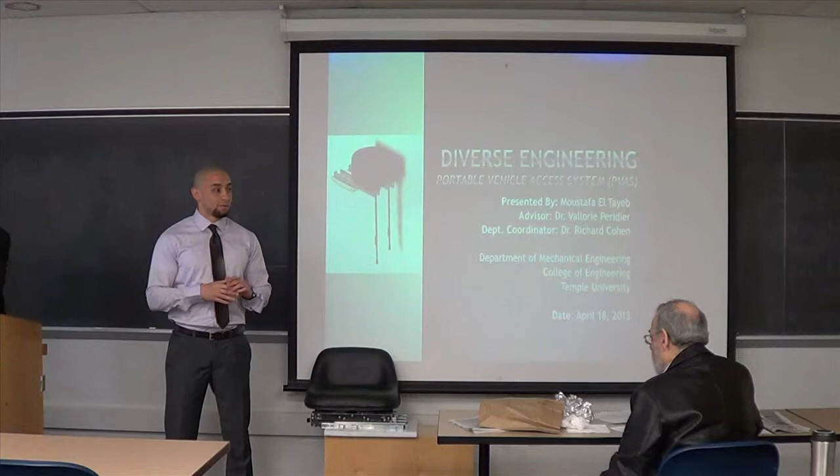I'd like to welcome all of you to the last presentation for Diverse Engineering on the College of Engineering. Today I'm going to present to you the final design review for our product, and we are very excited to show you some of the stuff we have today.

In the beginning, I'd like to go over my team. Myself, team manager, I'm doing project task documentation, critical design analyst. We have Cameron Buck, he's doing all design documents, budget, logistics stuff, public relations manager. We have Carmen Karanji, he's a functionality development and design constraint analyst. We have Anthony Atty, he's our main project designer and SolidWorks modeling.

Also, we have our advisor, our great advisor, Dr. Peridier, and Dr. Cohen, he's department coordinator for us, mechanical engineering.

So, I'd like to give a quick overview of the product. What we're making is a portable vehicle access system. It's a very simple device that helps older people, injured, disabled people get in and out of cars. It's not just made for older people. If you're playing football and you get injured and can't move your back for a while, you can buy it and use it to get in and out of cars.

Also, it's entirely mechanical. This device does not have any batteries, any motors, no wires, does not need high maintenance, nothing. It's very simple to use. It is made for everyone above the age of probably 15, 16. They can very simply use it.

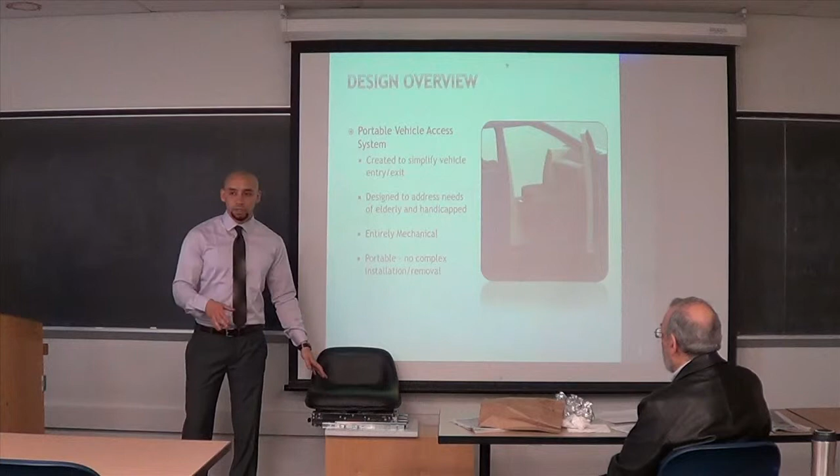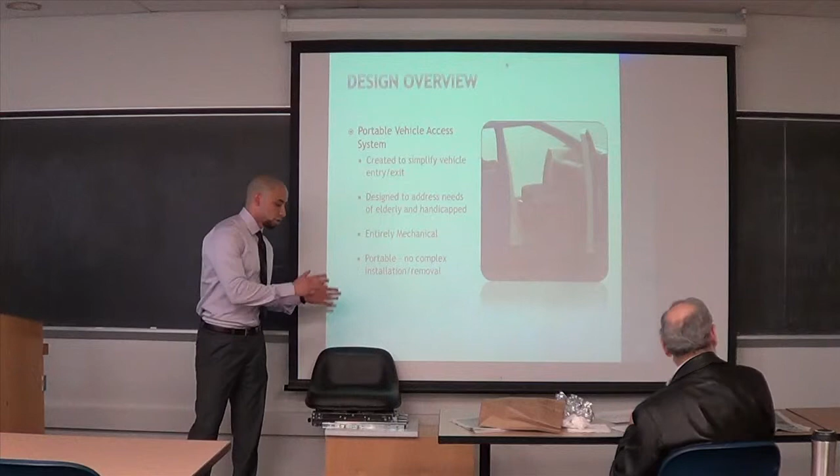And also, it's portable. You can just install it. It does not need any modifications to your car. You don't need to drill holes in the car. You don't need to attach any hooks. Nothing. You just put it in the seat, and it works. You get done with it, you take it off, put it in the trunk, and that's it. And you move on. It's very simple to use, really.

So, I'd also like to go over some of the constraints we have. In the beginning, we had some geometrical constraints. That's when we had our quarter scale model to get over these geometric constraints, because the device cannot interfere with the vehicle design already. The door does not open 90 degrees, so we had to overcome that. We had the roof of the car, you can't hit the roof, so there's a special height for the device that you can't exceed. Also, we had to go through some iterations on the materials to get a light and durable material.

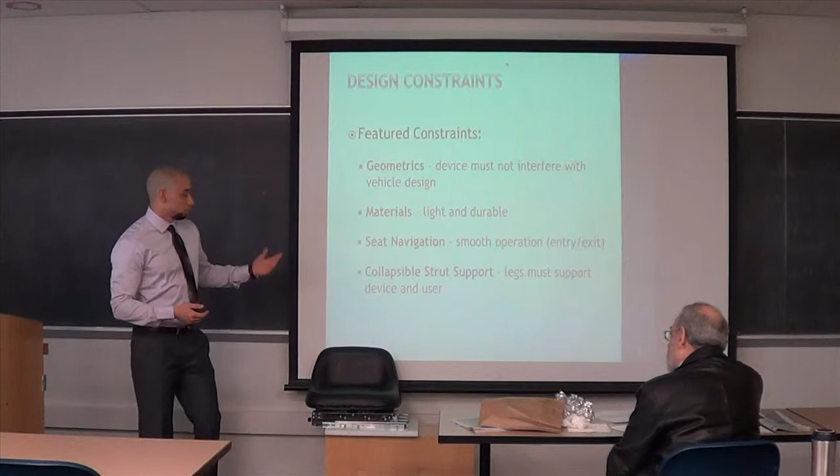Another thing is the seat navigation. It has to be very smooth in movement, so it doesn't get stuck when you're sitting on it. So it stays safe, it doesn't push you out of the car when you're not ready for it. It's very smooth to use. And the collapsible strut support, the legs in the bottom, when they are expanded, they support your weight, and you guys will get to see it in a second. You'll be very happy, but you'll see.

So some of the iterations we went through: the first iteration, during Senior Design 1, was just a brainstorming quarter scale model. We actually got a quarter scale car, a little kid's car, and we made a very small prototype, and it worked great. We had some sketches. This was just brainstorming to overcome the geometric constraints that we had.

The second iteration we had was SolidWorks. This is the phase when we started designing it in SolidWorks, drawing things, trying to visualize how this thing will work in real life, and how it will go from a computer program to a device that we can use right now.

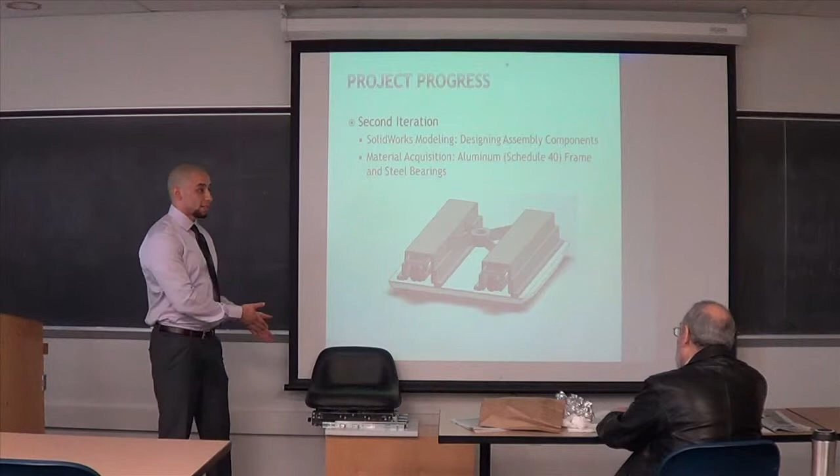Also during this phase, we went out to a couple vendors. We started looking for materials. We got some aluminum, which is durable, very light, and a lot easier to manufacture than other materials. And we also got some steel bearings, some U-bars. Everything you see here, we got in this phase.

The third iteration, which is the final iteration, led us to this design right now. This is where we started fabricating all the materials we had, welding and assembling everything. As you can see in the slide here, we have all the pictures.

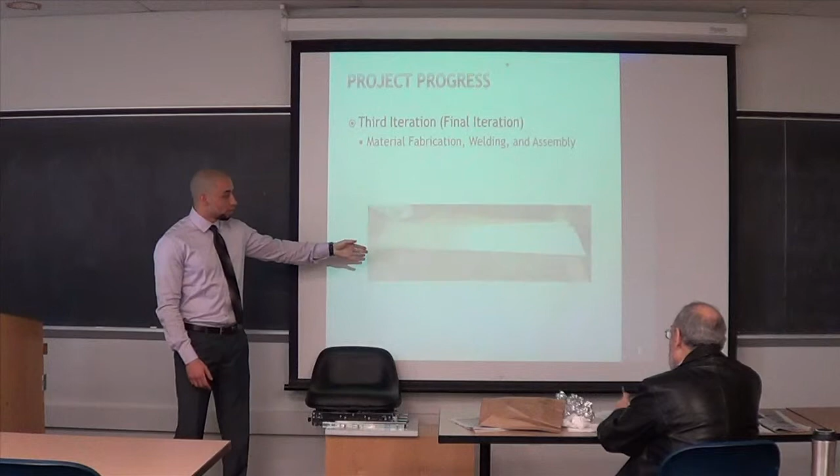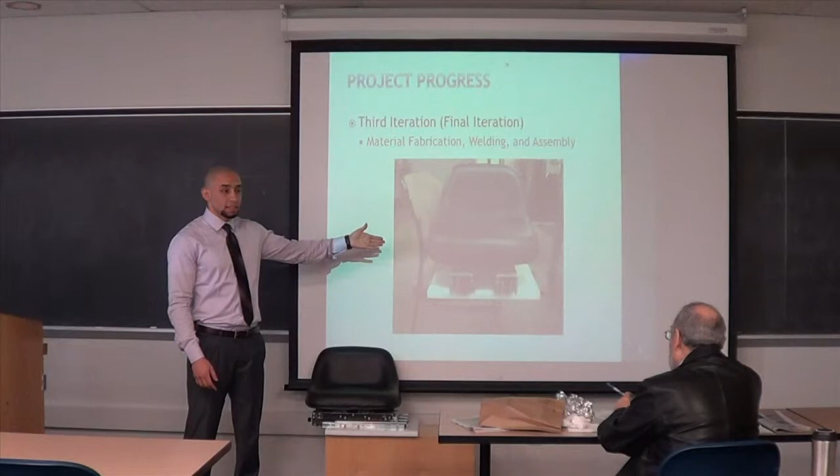You can see these are the U-bars before they get cut. This is the swivel seat. This is the swivel flat bar that the seat swivels on. This is when it's getting assembled. And now, this is after the seat is assembled on top of it. Here, this is fully expanded.

And the final expanded version of the product when it's in use now. So right now I'd just like to invite my teammates, Cameron Butt and Carmen Karanji. They'll give you a quick demo, very quick demo of this, how this thing works. Please enjoy it. All right, ladies and gentlemen, so it's a quick demo.

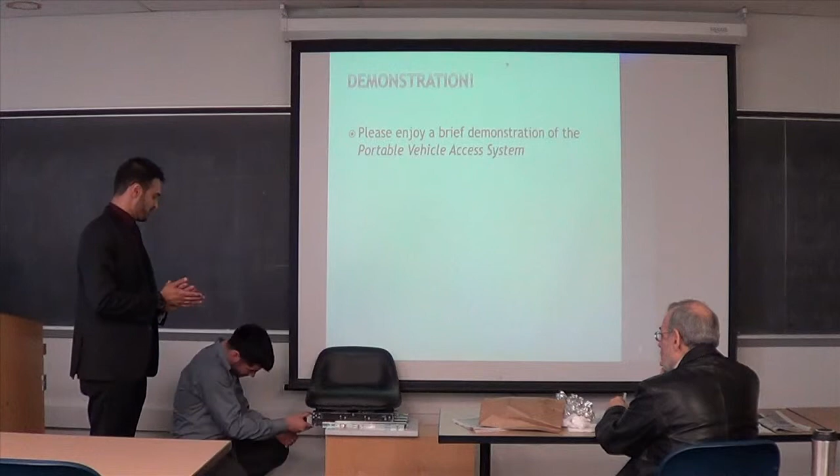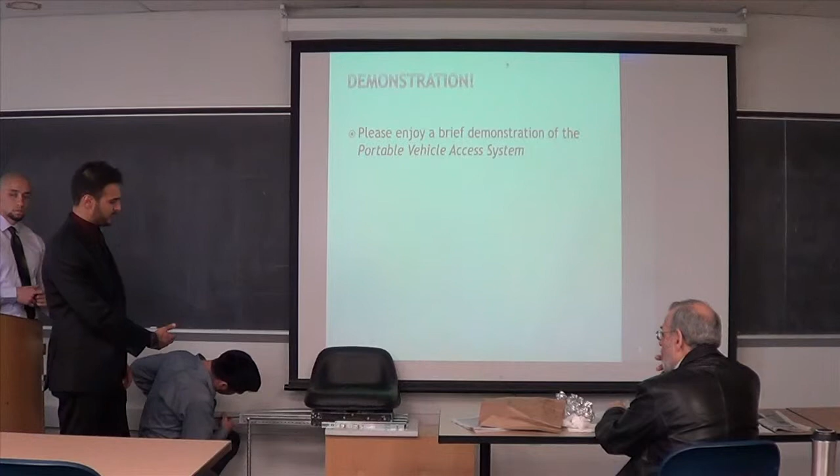Basically, Carmen here, what he's doing is he's expanding. Right now the device is installed within your car, so you gotta imagine with me for a minute, okay? He's expanding our legs and the rail system from the inside. He's installing push pins, which we've used temporarily for our prototype. And as the second leg comes out, we're preparing the device so that somebody can sit down on it and we can push them in.

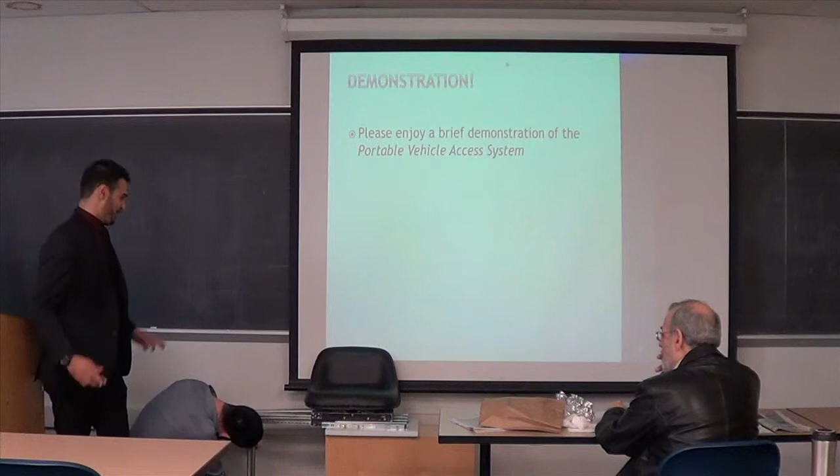In a minute or so, Carmen is going to invite me on the scary task of actually sitting on it, and I cross my fingers and I hope it works. I'm just kidding, I know it works.

So, the point of this is that it's quick, it's easy, and look, he's already done by this time. So that would be an automatic thing. This is just beta prototyping. So then this comes out on top of the rail, and it's free to rotate. So now I'm just going to move this car a little bit so you can see me get on it.

Take a seat, buddy. Sits down just like it's a normal chair. Turn him around, send him in, push those legs in. See, simple as that. I can put my coat on, my seatbelt on, and then you shut the door. You're done. Walk away, drive away. That's all you have to do. And then you just do the reversal to bring him out. That's it. You drive your car, close your door, and drive away. You don't have to do anything else.

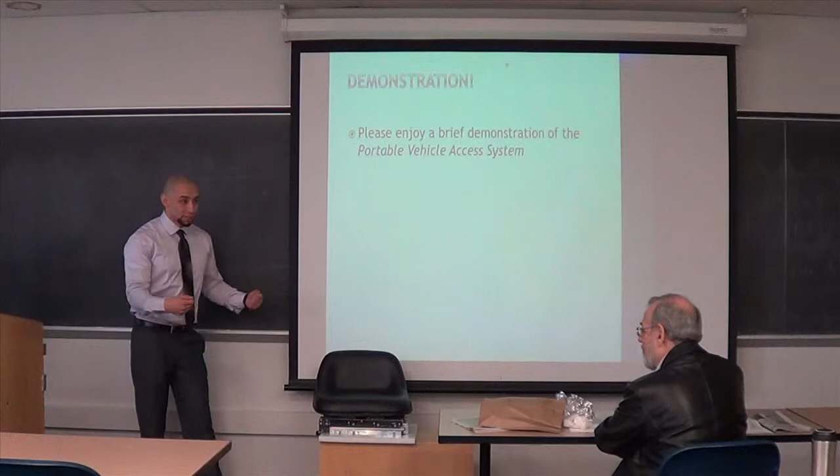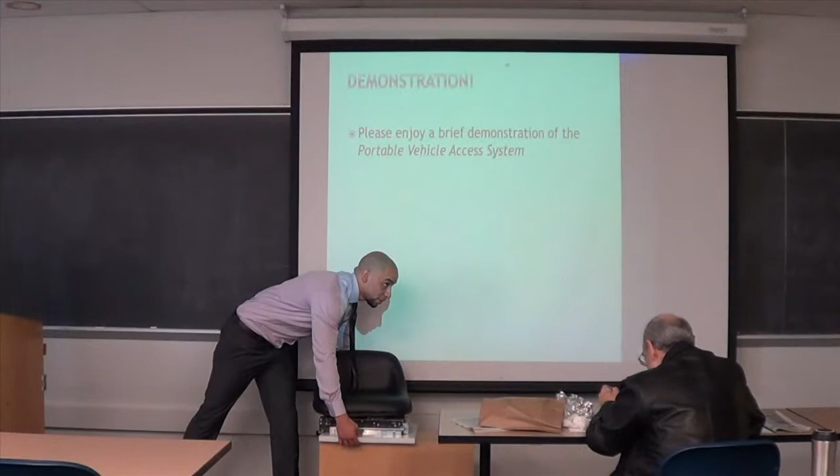One more thing I'd like to add. You saw all this work that he did in the beginning, expanding everything, putting the pins. The pins will be automatic, like a push pin. It will be spring loaded. This is just a beta prototype. That's why right now you can see the seat. This plastic base right here sits on the seat. It should be contoured, but it's not for the purpose of demonstration here, because we can't have a contoured plastic base on flat wood.

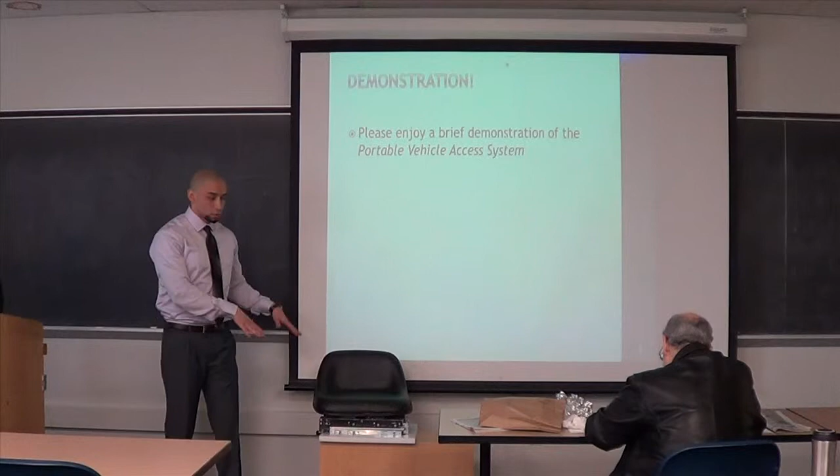But when it's contoured in the seat, this thing will just sit on there, and once you pull the legs out, you extend them, the lock pins will lock in place according to the clearance between the floor and your car height. So that's how we know this works for every car height. If you have a higher car, this will still work. If you have a lower car, a coupe, this thing will still work with it. That's everything you have to do.

No more carrying your grandparent to the car, no more hustling inside, no more pushing someone inside and injuring your own back in the process and needing someone else to put you in. You don't need any of that anymore.

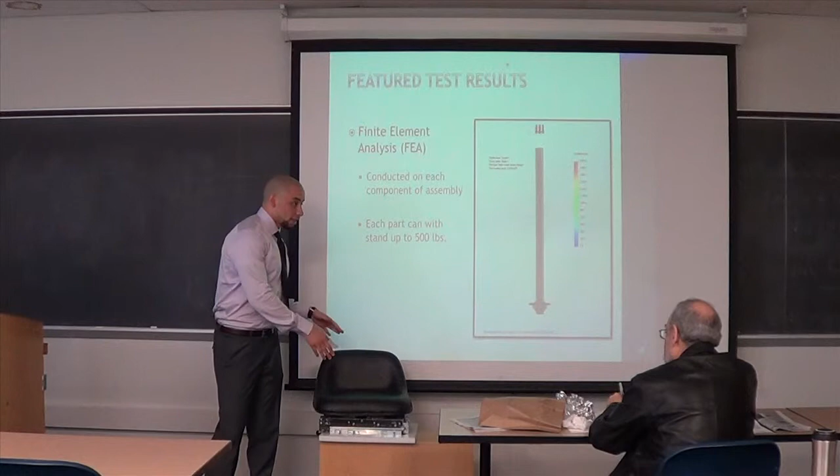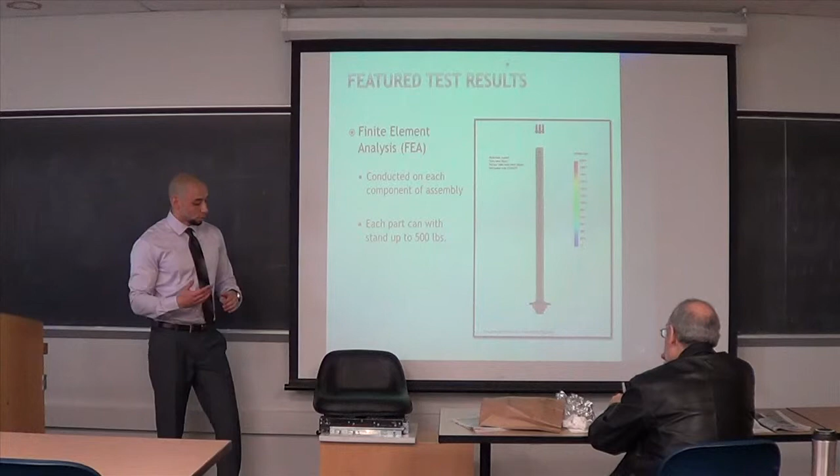So some of the testing we've done on this product was done before we actually manufactured it, in SolidWorks. We did a lot of stress tests on every component; the legs right here, as you can see, can hold up to 500 pounds. We are making this device for a 400 to 450 pound person, so it will withstand your weight, that's for sure. That's what the testing has told us already. For real life testing, we just saw this thing work in front of all of you.

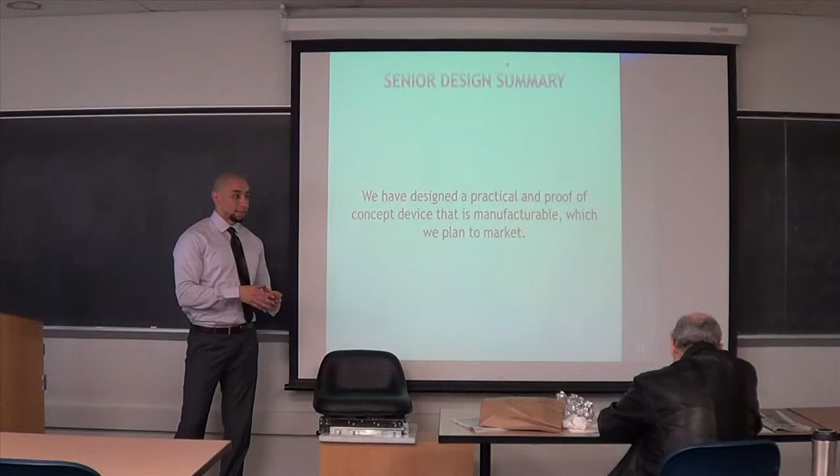So during senior design, basically what we were trying to do from the beginning is visualize a whole concept from an idea to bringing something to paper and a computer model, and then bring this computer model to a real life device, and after that you test this device to make sure it's working. After we've done all that, I think we succeeded so far in doing that.

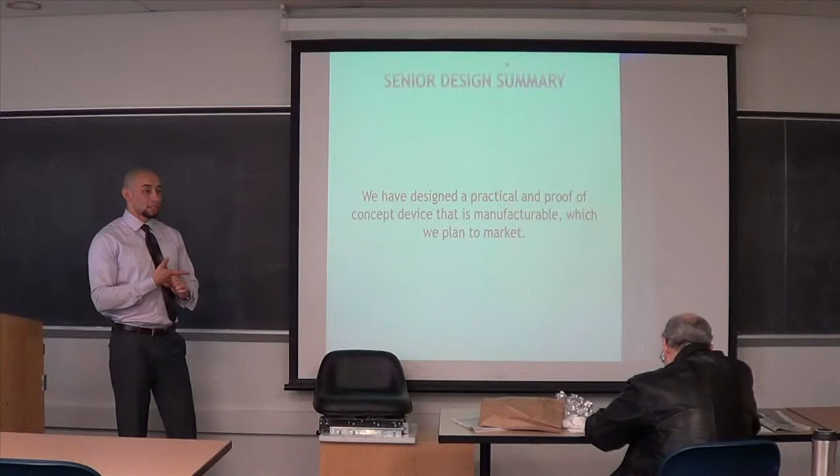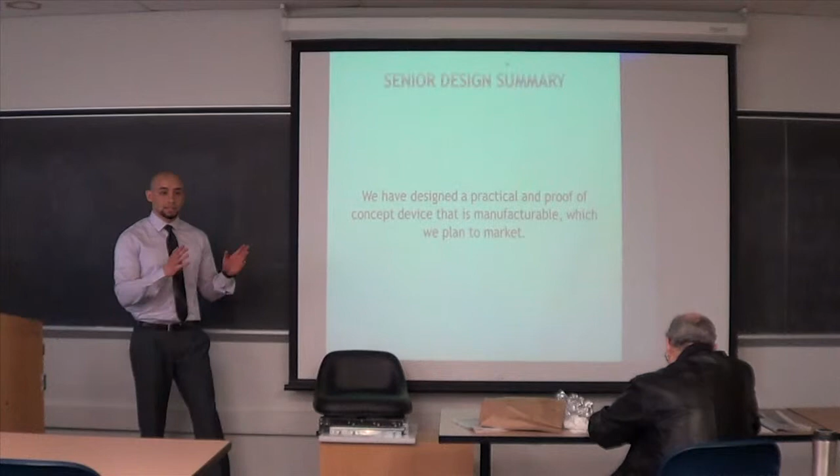We did all the testing we needed, and I think right now we can say we have designed a practical and proof of concept device that you can manufacture, and we're planning on marketing this device. This device is not just going to be for a senior design project anymore. No, this device is going to be marketed. Which brings us to the next thing.

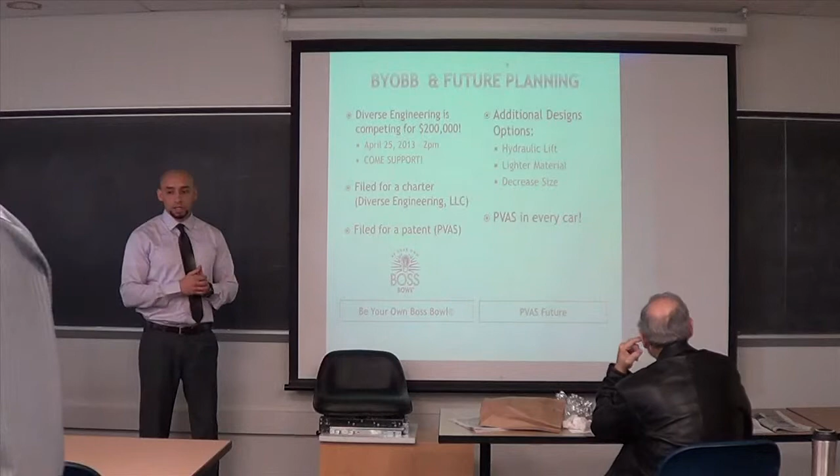Our team, we're competing in the School of Business for the Be Your Own Boss Bowl competition. It's one of the most respected competitions all across the U.S. with more than 300 judges. And my teammate here is handing out flyers. Actually, I'd love to see all of you in the presentation. Final presentation and reception is next Thursday from 2 o'clock to 6. Please come support us. We'd like that.

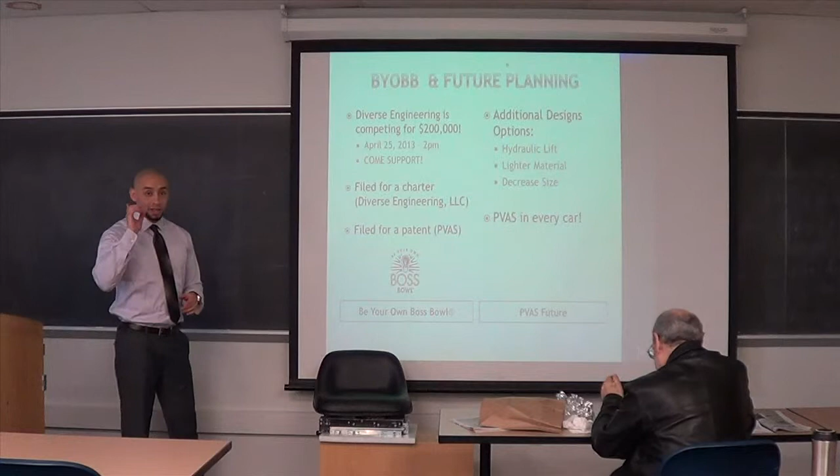One more thing. Diverse Engineering right now, as of now, it's not just a senior design team in the College of Engineering. Actually, we just filed for a charter. So now it's Diverse Engineering LLC. We're starting a little company of our own, and that's how we're planning moving forward. Another outstanding thing that's actually making me happy in person, we filed for a patent. So this device, it's not yet patented, but it's patent pending for Diverse Engineering LLC, which brings us to some more future planning.

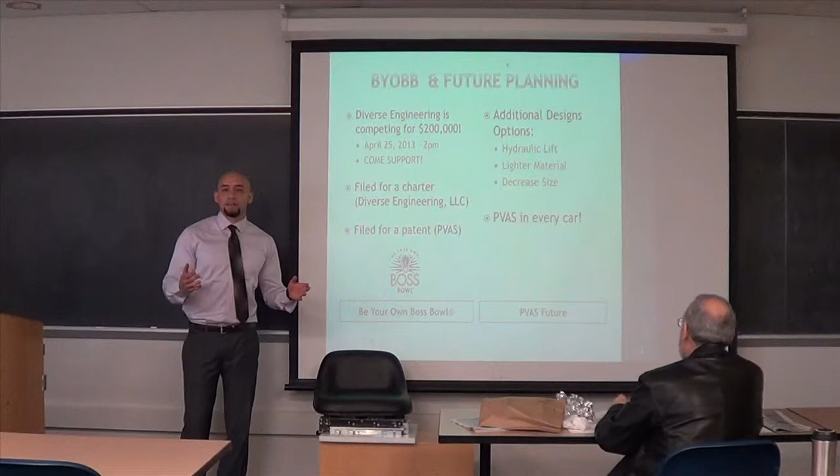This brings us to more options for different cars. What if you have a higher car, a very high car, a Jeep, a 4x4, a truck? We can make this work with some hydraulic lifts, and of course with the proper machining and proper facilities, we can make this way lighter and smaller too. So it will be easier to use. Everything you see now, as easy as it is now, we're planning on making this easier.

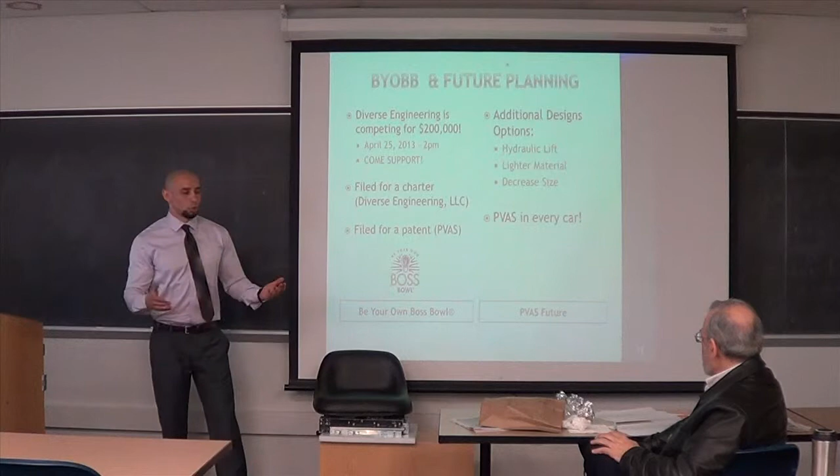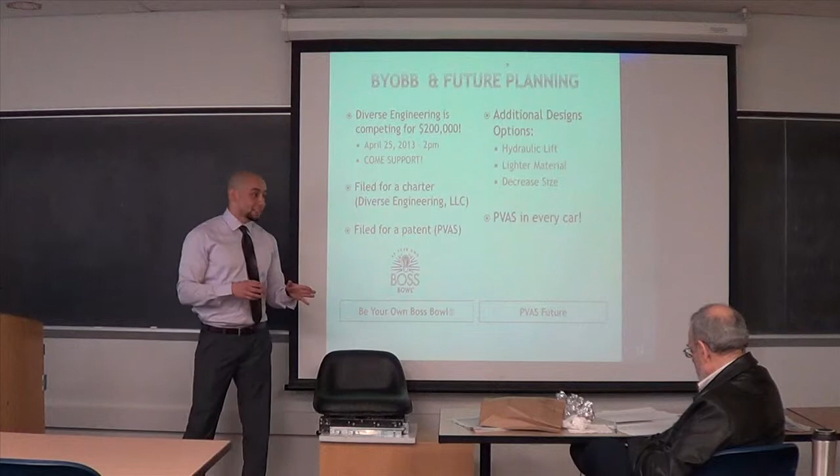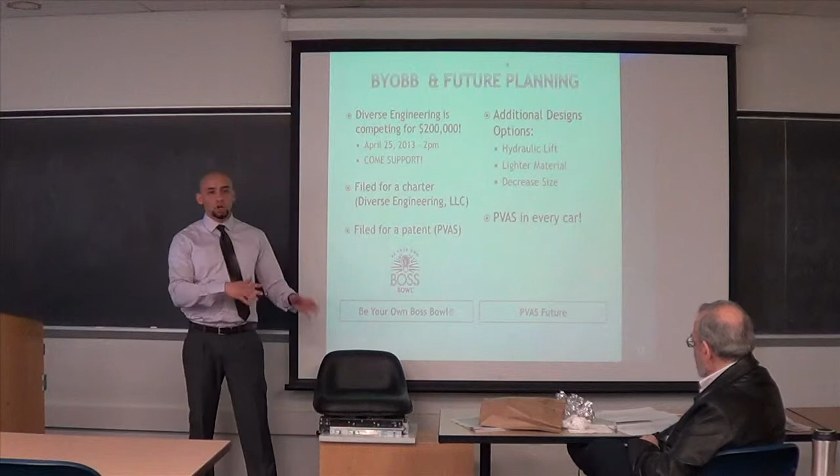And some of our business plan includes by next year, this product will be in dealerships, it will be distributed by healthcare providers, and we're already in contact with all of them. Also, by the end of next year, or the beginning of 2015, PVAS, the Portable Vehicle Access System, will be in every car for the people who need it. You can buy it in Target, you can buy it in Costco, it will be everywhere. Okay? Any questions, concerns?

So I've seen something like this before and tried it myself. It wasn't sliding though. It was just rotating, which is the essential part, because when you open the door, in most cases you can sit right on the seat. Then the problem with people who have problems with their legs or arthritis is they cannot rotate, they cannot move inside. So the rotation is the key part.

So that one you can buy, and it's thin, and it's nice. You just sit on it, and then you just lift your legs a little bit, and you can do it by yourself. You don't need anyone. But even if it is quite thin, it's a couple inches and it swivels a little bit, it makes you high on the car seat. This thing is massive.

This thing is high right now, I understand that, but again, this is only for the purpose of prototype demonstration. We could not get enough resources to make the seat smaller, that's why we ordered a pre-made seat. This was ordered, this was just assembled on top of it. This seat has a 3 inch cushion, which we don't really need if we made it on our own.

Also, to answer the first part of your question, I can put something to swivel on top of a car seat. However, a lot of disabled people and older people have problems raising their legs. So if this thing is higher, if it saves you 3 to 4 inches of raising your leg, then this saves you the effort of having someone bending down, trying to get your leg, one leg at a time, inside a car, and then swivels you.